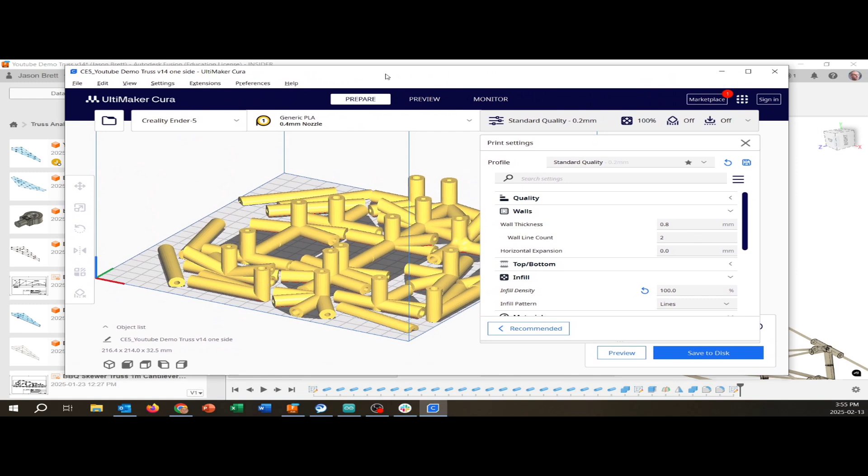So we've already taken a look at how to model the truss and check out its structural buckling in Fusion 360. And then we came along and designed all of these nifty little nodes right here. And now what we want to do is take those nodes out of Fusion 360 and put them onto our 3D printer. And they'll come out looking something like this.

And then the slicer software will be able to generate G code so that we can come down here and preview everything that's going to cut. And then we can take that and put it into our 3D printer. There's those flat sides that we left on the bottom of the nodes.

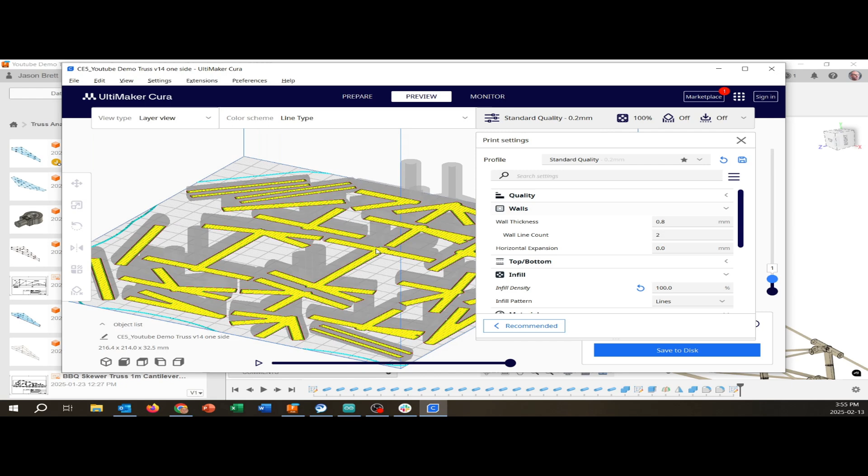And on the Creality Ender 5s in the shop, it might take a day. On some of the newer, faster 3D printers, maybe a little bit less. Really kind of depends on some of the settings that we put in there. So we're going to take a look at how to set all those settings up. But before we get there, you're going to need Ultimaker Cura on your computer.

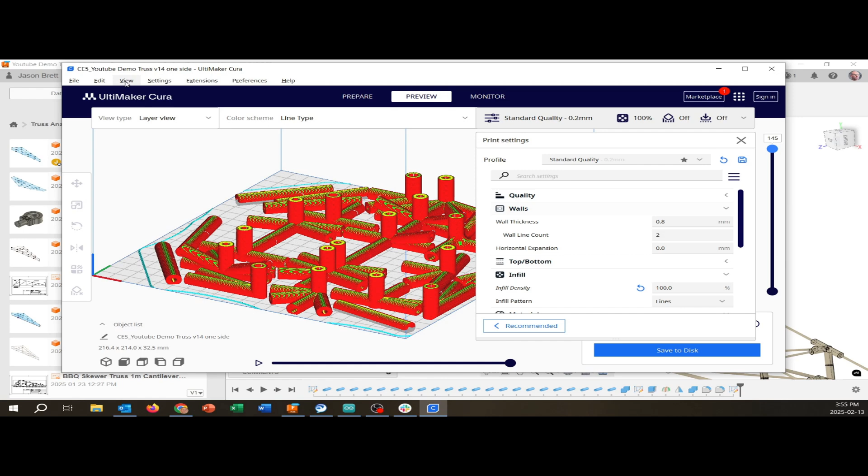Now, this is February 2025. I may be using different slicer software later on. You may have different favorite slicer software. All of the slicer software works pretty much the same. But anyway, I'm going to be talking about Ultimaker Cura. It works great with the Creality Ender 5 printers that we have in our shop.

So what you're going to do is Google Ultimaker Cura, come in here, download the latest version of Ultimaker Cura, and put it onto your computer. It runs on Windows, it runs on Mac, it runs on Linux. It's pretty cool, and it's great that Ultimaker makes that available. Not that they really had all that much choice, because the core of it is open source to begin with.

Like I say, there's other slicers. They're great. If you want to use your favorite slicer, go right ahead. You know what you're talking about. If you've never done it before, I'm going to be talking about Cura. Okay, so go ahead and download that.

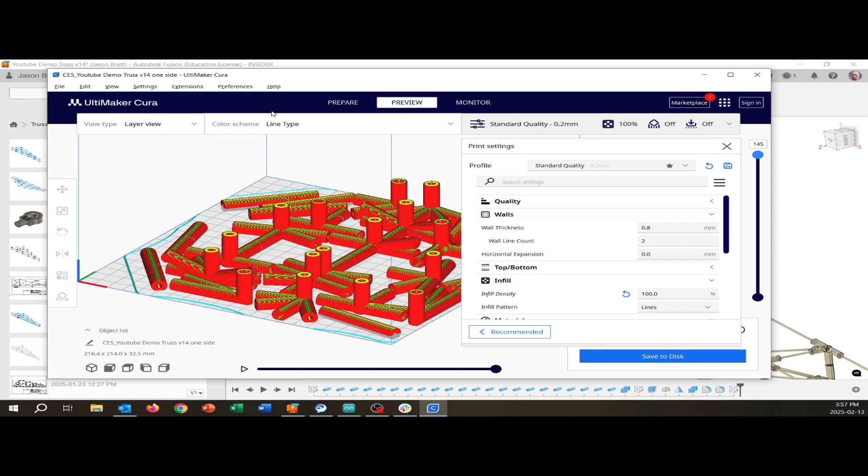And when you install Cura, if you're one of my students at BCIT, you're going to have to tell it what printer you're using. So you're going to set it up, and tell it that you want to create a file for a Creality Ender 5. And to do that, you'll come into Settings, and you'll go into Printer. And you can see I've already got Creality Ender 5 in there. That's because I've come to Add Printer.

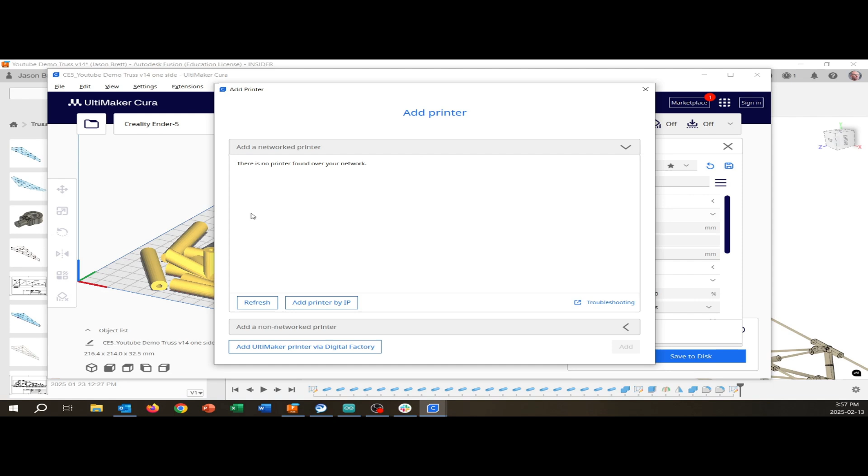And you'll tell it that you're using a non-Ultimaker printer. Where is it in here? Add a non-networked printer. It doesn't have to be an Ultimaker. You'll come down here, look at all of the different printer names. When you get to Creality 3D, in February of 2025, we have 3 Creality Ender 5s in the shop. So there we are, the Ender 5. It's not the Plus, just the 5.

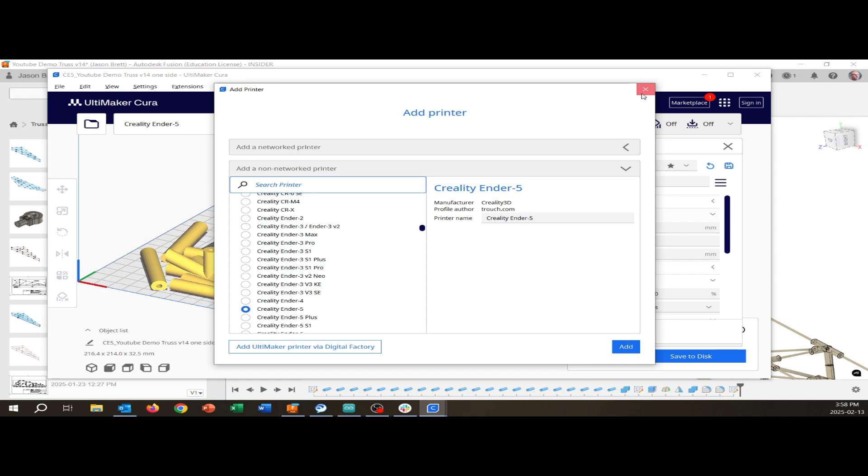So you can add that printer to your settings, and that will have all of the setup information on bed size, print speeds, and everything that you need to get started. If we have a different printer, well, maybe we'll be using different slicer software, and I'll tell you about that. If you have a different printer, you'll have to set that up for your printer. But again, you don't need me to tell you that if you've got your own printer.

Okay, anyway, this is where we're going to get. And this is where we are right now. We have a whole bunch of nodes, and we want to get them out and into Cura in the easiest way possible. Okay.

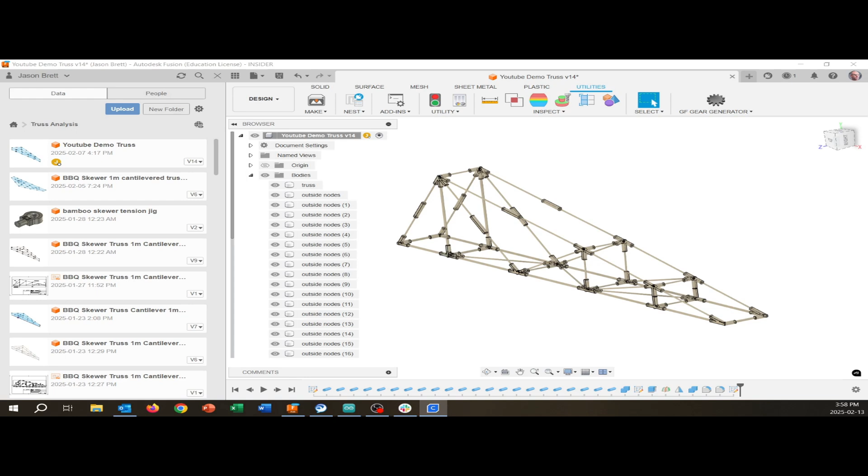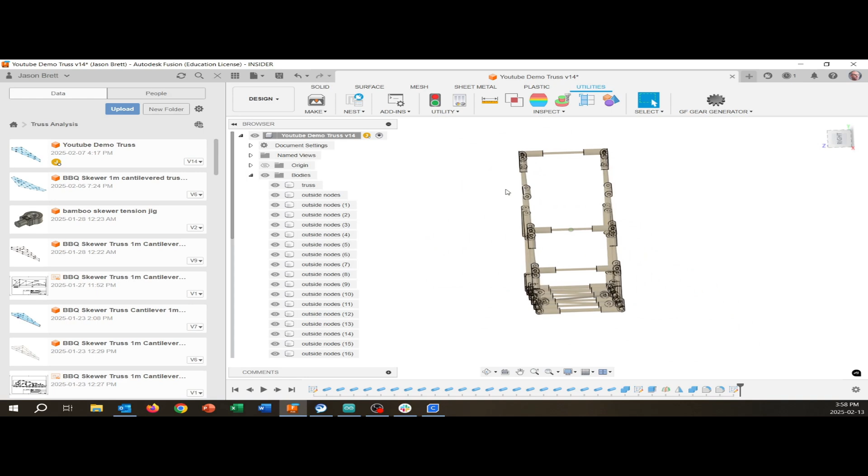Here we go. Alrighty. So I'm in here, and I can rotate around a little bit. And what I'm going to do is look at my project right from the end. And I'm going to export this in 2 halves. And the reason I'm exporting it in 2 halves is because I've got flat surfaces right here. And because we started drawing on the top plane, one set of these surfaces doesn't have to be rotated at all.

The other set of the surfaces has to be rotated down that way so that it fits flat on the print bed. Okay, so let's start this out. Now, we don't want to print the bamboo skewers. So make sure you come in to your bodies and turn off the bamboo skewers. You should just see the nodes right now.

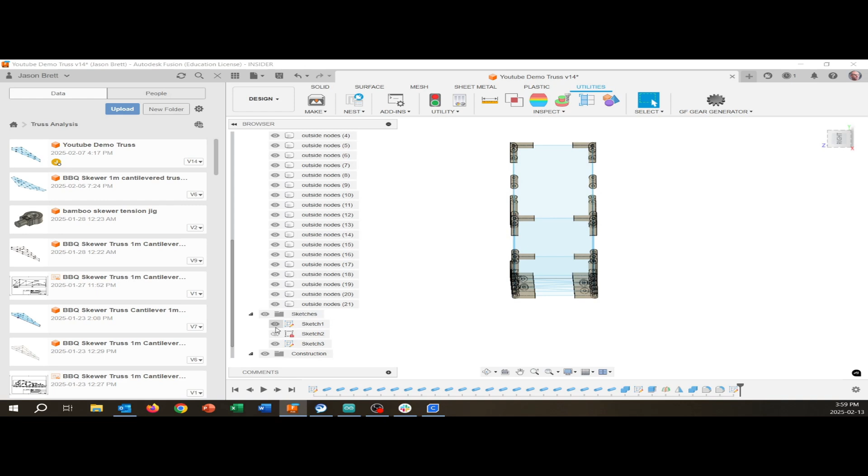It's possible that your sketch might still be turned on. Okay, so if you still see the sketch there, you can turn off the sketch. It's possible that you might have a construction plane turned on. So if you see a construction plane like that in the middle, you can turn it off. Not that that would be exported, it's just nice to get rid of it.

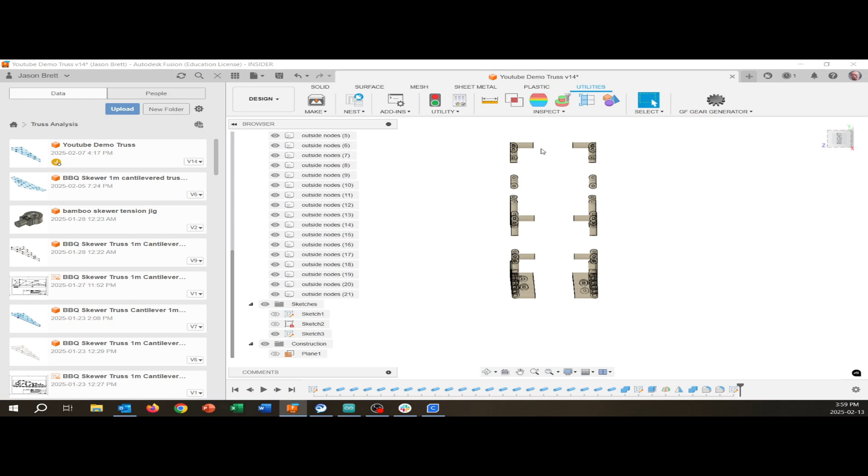Okay, now what we're going to do is we're going to export this half of our truss first. And in order to do that, we are going to highlight everything on this side. And I am going to right click on one of those. And I am going to come down to where is visible. Show hide. It's right down here. And you see that little eyeball? I'm just going to turn the show hide.

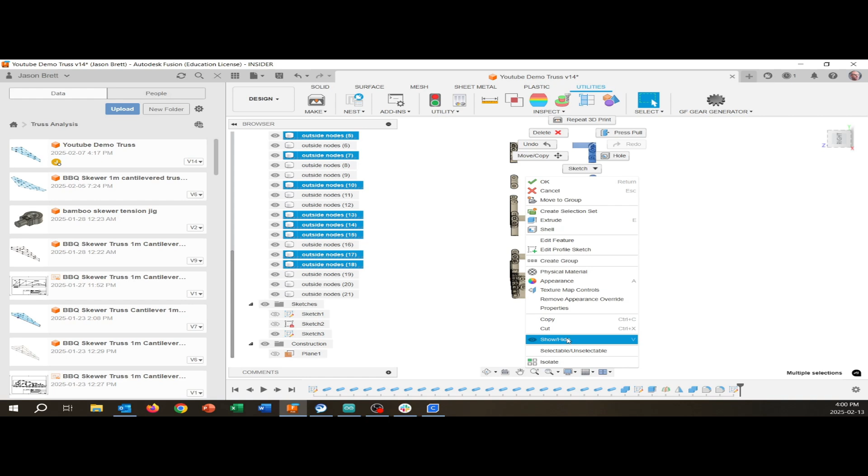And you'll notice that in our browser, all of those little eyeballs are going to blink off. And boom, I can't see them. They're still there. Just I've turned them off, right? Okay, and that means that I've just got these sections left, right in here. And they all have the same orientation. So whether I have to rotate them or not doesn't really matter.

Oh, I should have been working in solid mode, but eventually we are going to come over here, and to get these out of here, we are going to come to the utilities. So come along the top, and in the tab, come to utilities, and then you'll go make. And then you want to make sure that you've got this set up for export, because we are going to export this as a 3MF file. You could also export it as an STL file, but 3MF files just store a little more data more easily.

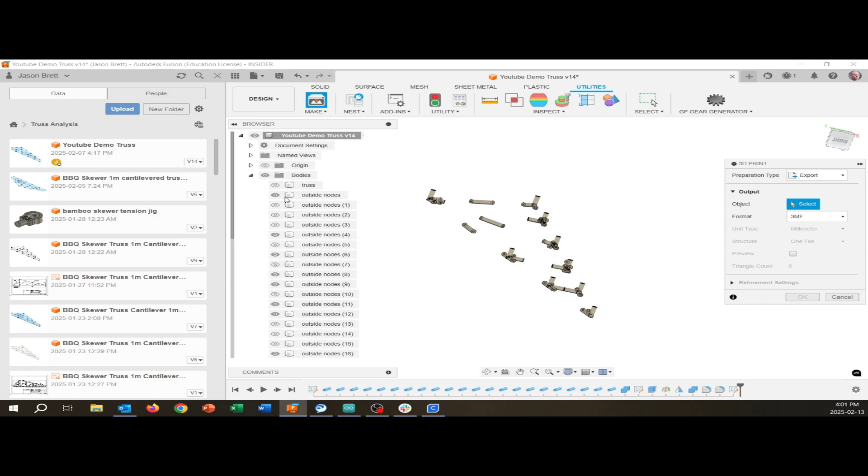It says object. What object do we want to select? Now, if you come in here and try to pick them up one at a time, you'll only get one object at a time, and you'll have to do like 26 different exports. So what we want to do is come over here to our browser and come up here and just click on bodies right up here. This is going to export all of our bodies, but only the ones that are visible.

Okay, so it shows you all of the bodies, but you'll notice that the ones that we're exporting are darker. Okay, those are the ones that we're going to kick out right now. And if we selected everything right, this should be good. So we're going to go export. I like to export as a 3MF file. If it says STL, you're fine too, but let's do 3MF. We're going to export them all as one file, so we don't have to bring them in one at a time. And we'll just hit OK.

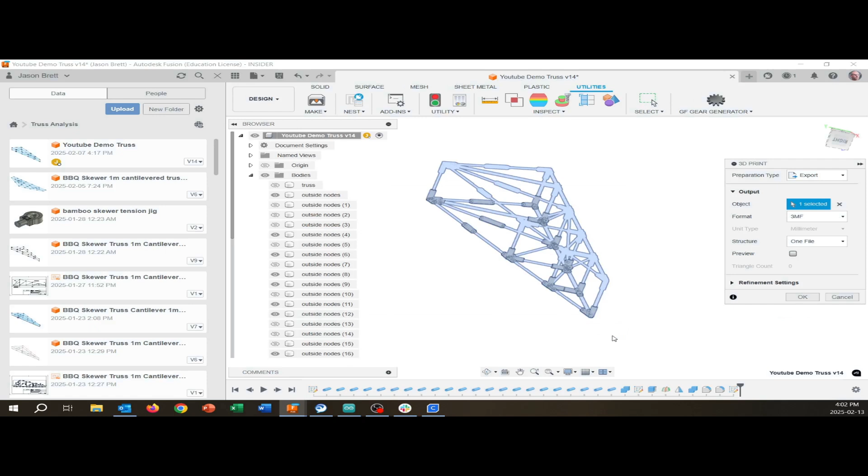Now, this window is going to pop up right here. You're going to turn on Save to My Computer. You're going to pick a folder that you want this file to go to on your computer. And I'm going to export this as my YouTube demo truss. Oh, I'm on to version 14 already. And I'm going to call this one side of the truss. I can't remember if it's the side that needs rotating or not, but I'm just going to save that. Bang, there I've got one side of the truss.

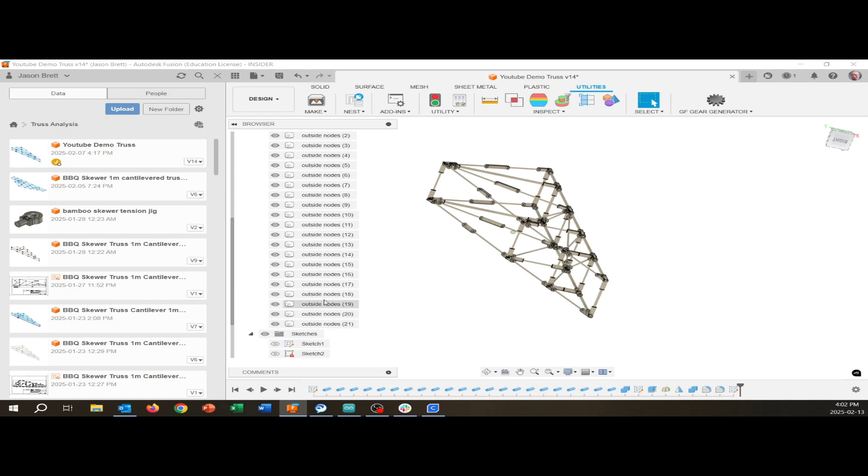Okay, and now I'll come in here and I'll turn all of these ones back on. Make sure you get all of them. I think there's probably a faster way to do that, but anyway, just check that all out, and they're all turned back on. And now I am going to turn off the other side of the truss. Oh, make sure I turn off the bamboo barbecue skewers. I do not want to export them. We put a lot of work into using them to create holes in our nodes.

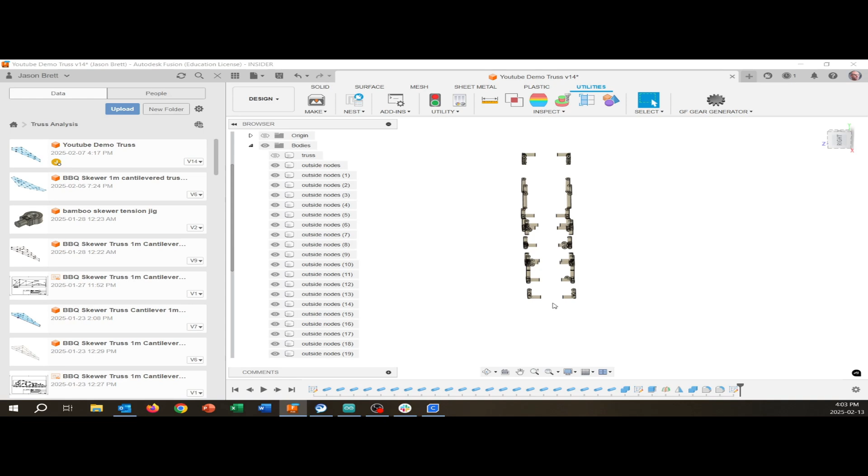Okay, and so now what I'm going to do is I'm going to highlight all of these ones that I just exported, and I'm going to right click on one of them, and I'm going to go show hide, and poof, they have all disappeared now.

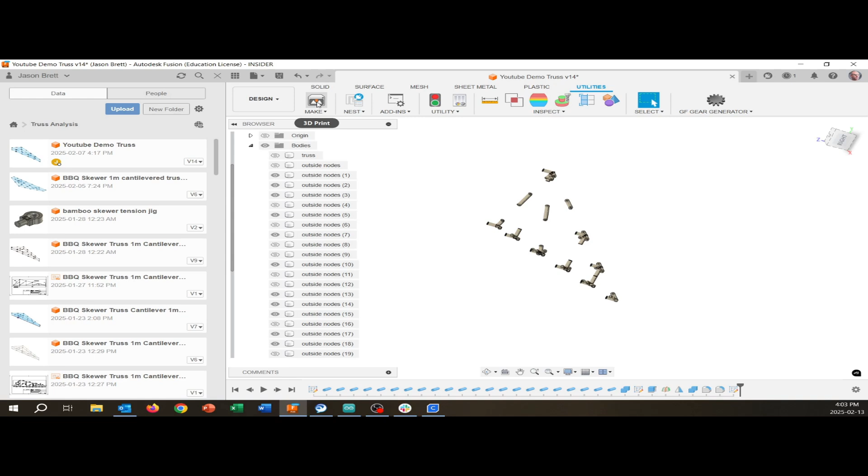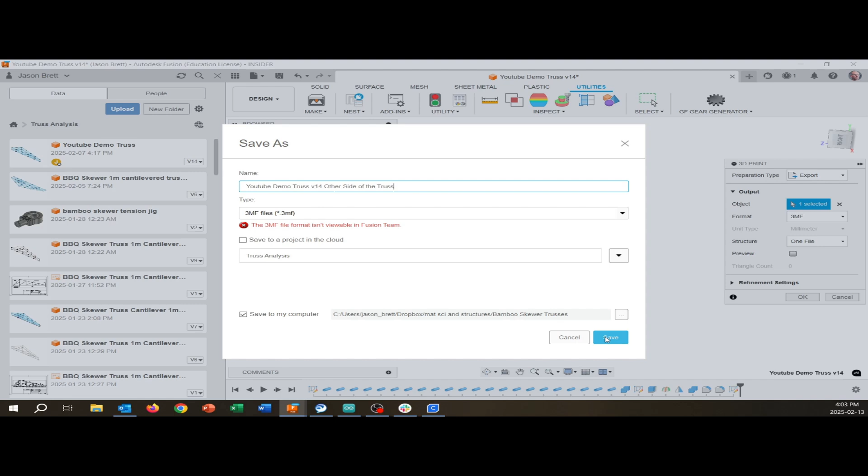And now when I go and do my Utilities, Make, Export, the object that I select will also be bodies, but you'll notice this time all of these ones are turned on, and I'm just going to say okay, and YouTube demo truss V14. I'm going to call this other side of the truss, and there we go. That's off to Fusion 360. I'm going to turn these all back on.

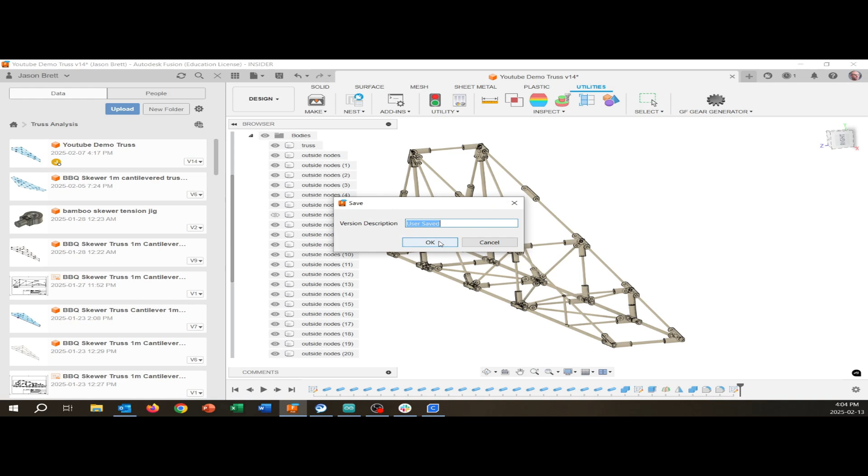And I have now extracted all the information that I need from here, and I can actually hit save. And I think we're pretty much done with that truss. We can close Fusion 360. Well, I don't want to jinx myself. I'm just going to minimize it.

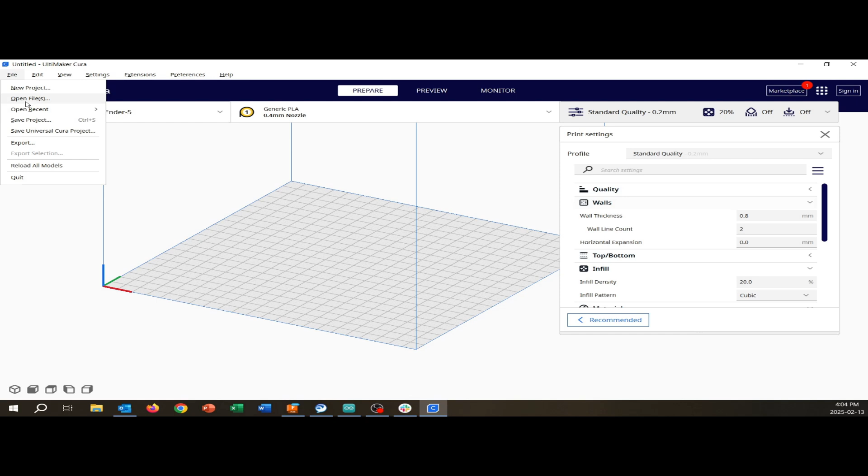All right. Now, hopefully you've had a chance to get Ultimaker installed on your computer, or your choice of slicer, and you've had a chance to get it set up so that it says Creality Ender 5 right here, or whatever printer this is going to be coming out on. Okay, and now we're going to come in here and go File, and open a file. Let's just search by date modified. Here's one side of the truss, there's the other side of the truss, and you'll notice they're in 3MF format. I'll start with one side.

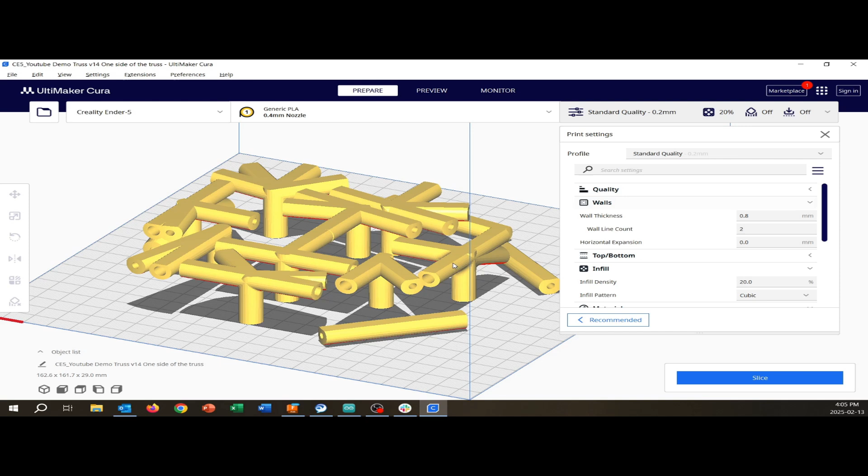And in this version, it brought all of those parts in, and you can see these ones all compacted down onto the print bed. Now I can rotate around and change my view. The right click button lets me rotate like that. Center mouse button is zoom in, and if I hold the center mouse button, I can pan. Okay, what I'm going to do here is pull that up, zoom out a little bit, use the left mouse button, right mouse button, and just go Select All Models, because I've picked everything up in here.

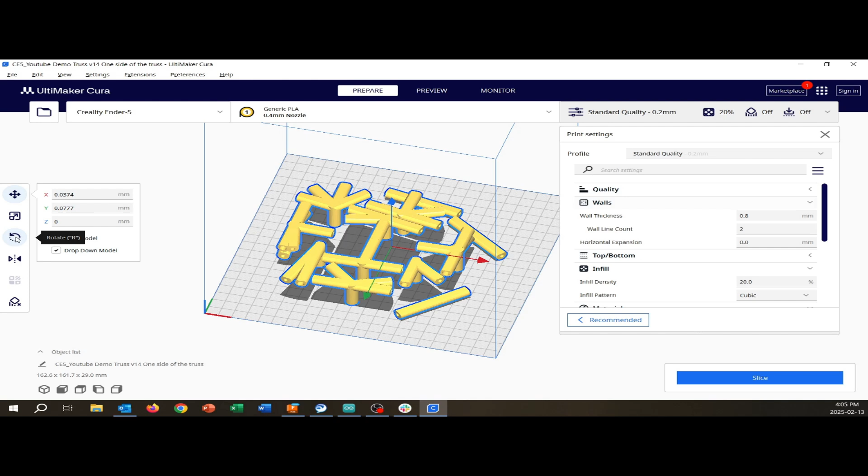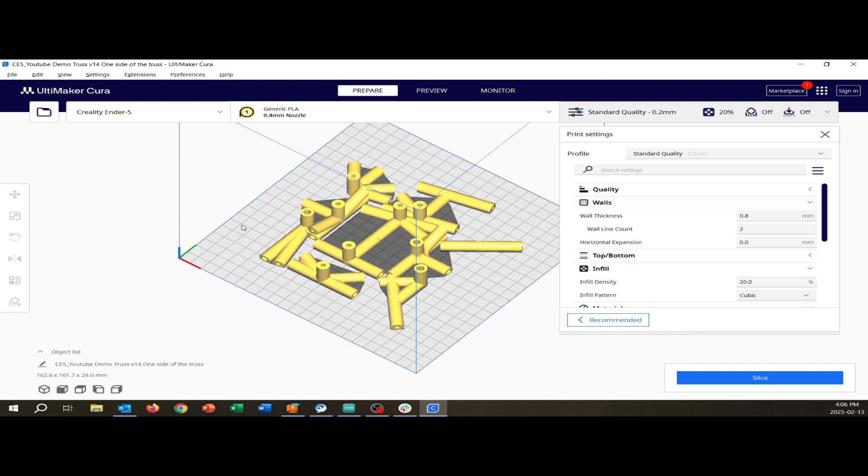And now over on this side, I have move, I have scale, don't touch scale, and I have rotate. And I'm going to take rotate, and I want to flip this around. If you look at it right here, all of these ones are upside down right now. I'm just going to rotate them all 180 degrees. Make sure you get that 180 degrees. That looks really good. And now you can see that because I rotated them around, they're intersecting with each other. So right click on one of them and go Arrange All Models. And Arrange All Models should give each of them their own space on the print bed.

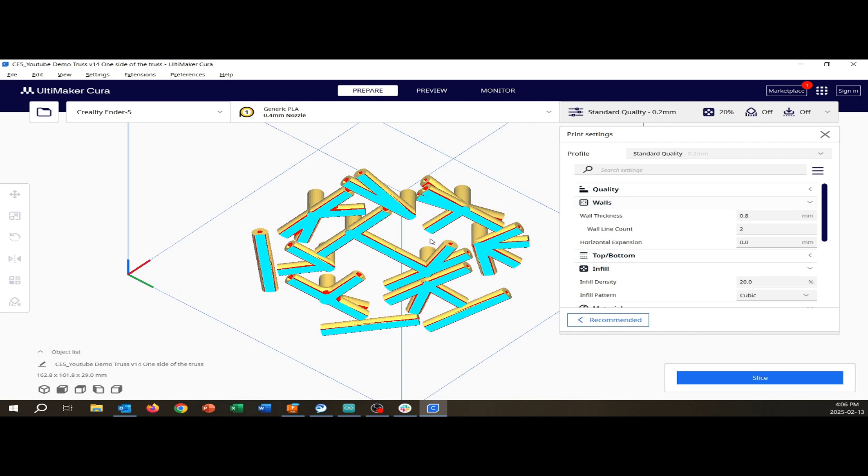You can also rotate down here, and you'll notice that they're all showing nice flat blue sides on the very bottom of the print bed. Those little stripes of red are areas where it would like to provide some support material, but we're not going to need that. The printer can manage getting by without a little bit of support material. We've also aligned these so that we're going to just print straight upwards here. Everything's flat on the bed, easy to print. This is about half of what we've got to print.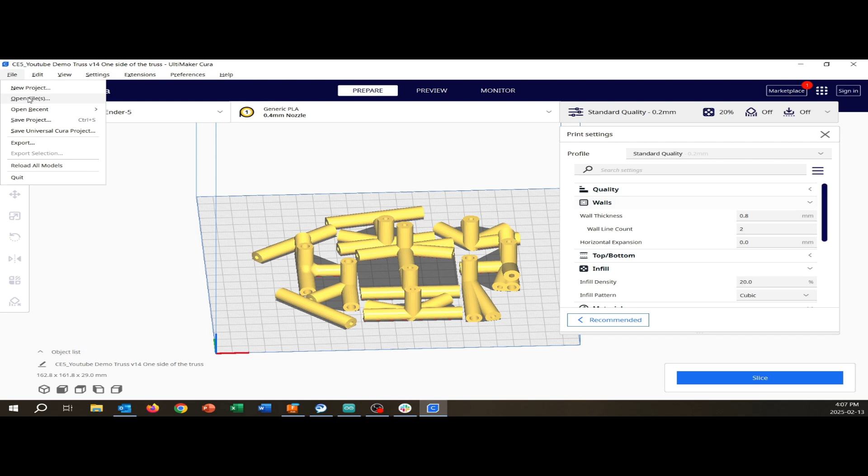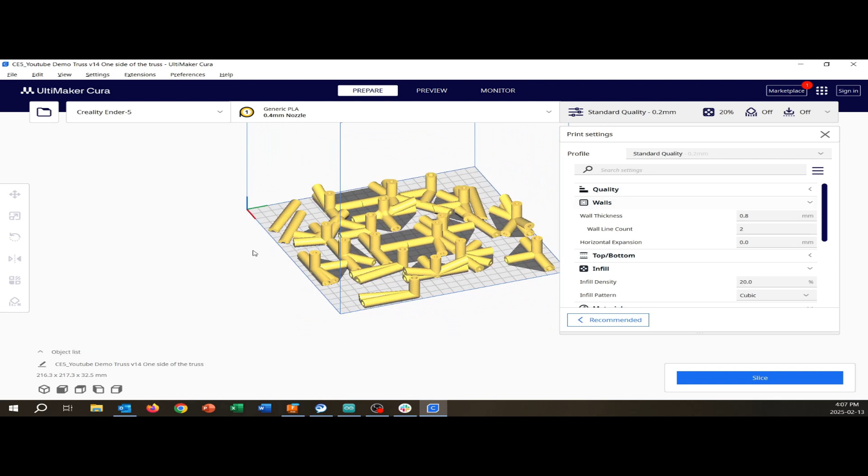It's going to be a full print bed by the time we're done, because now we're going to come in here and go Open Files, and we're going to do the other side of the truss. And thankfully for our case, the other side of the truss comes in really nicely, and we don't need to rotate it or really do anything with it. We can see nice big flat pieces on there, but we do need to come in and right click and go Arrange All Models.

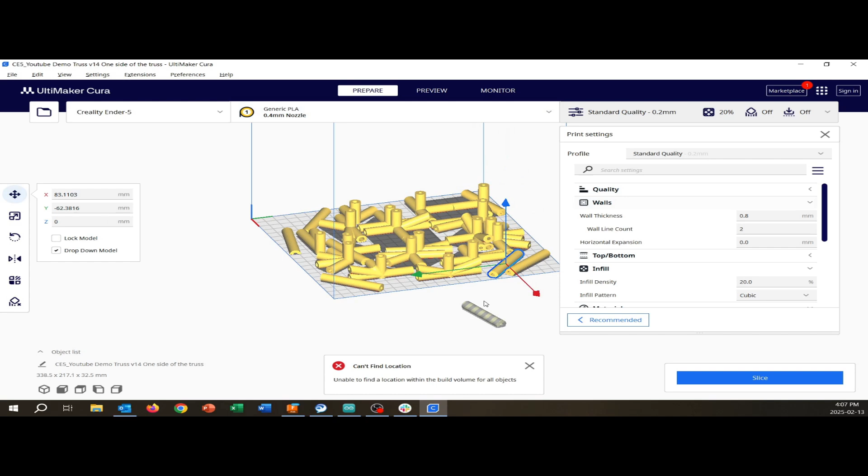And you see it says it can't find a location for that one piece, and we've got one or two pieces that aren't showing up as light blue. We'll deal with them first. Okay, so if you're seeing something like this, pick the piece that's not showing up as light blue at the bottom, come to Translate, or Move as it's called in here, and just lift it up in the air and let it drop down. And it should be showing as blue on the bottom. So I'm not quite sure what's going on and why that's not doing it. Thankfully, there's another way that we can get that to show a nice light blue surface on the bottom.

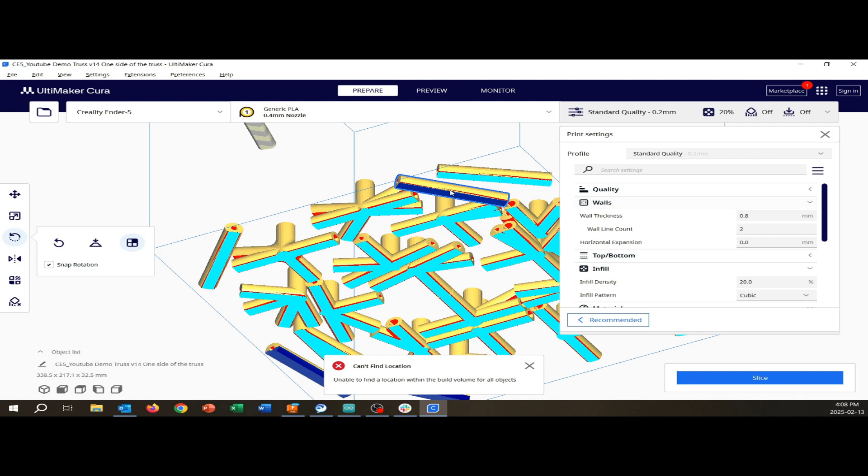We can come in here, and if I pick that piece and come to rotate, this icon right here, select face to align to the build plate, and I can come in here and tell it to align that face to the build plate, and well, I guess that's as aligned as it's going to get. Looking in that way, it seems pretty nicely matched to the build plate.

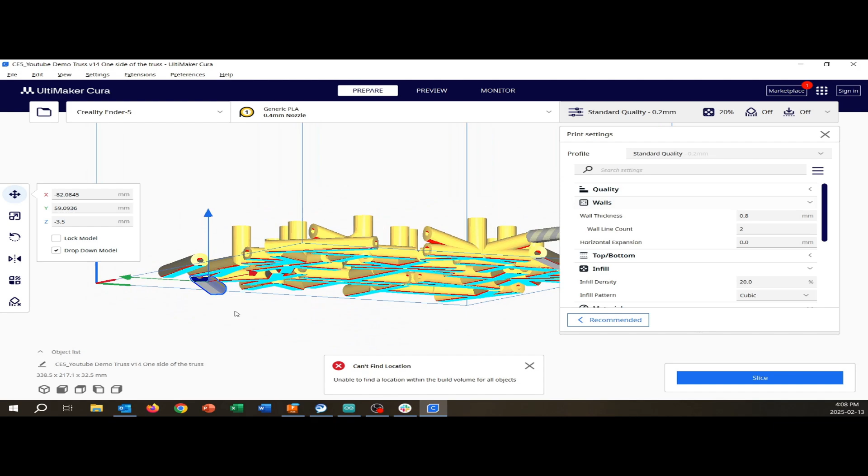You can see these ones over here are a little bit low. Those ones, I'll need to lift them up and drop them down. That one turned nice and blue, and that one turned nice and blue. This one's still giving me a bit of fussiness for some reason. There we go. It's nice and blue now.

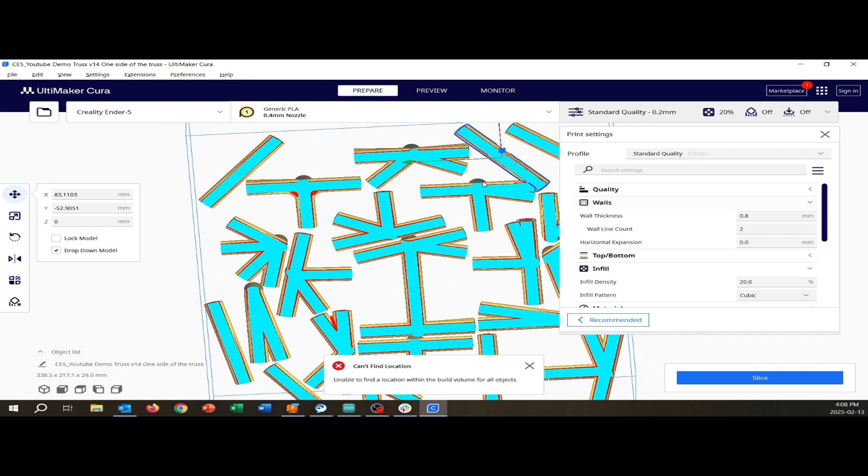All right, but we're kind of stuck because we've got one that's not quite on the build plate. The computer couldn't quite figure out how to fit it in there. So what I'm going to do is I'm going to look at this from the top. So under View, Camera Position, Top View. Now I can see everywhere where I've got a little bit of space, and I'm a little bit hamstrung because remember we had two nodes that were really close together. They're actually going to print together.

I don't know how you're going to be able to get your skewer in there. You might just end up having a 3D printed node for that one. Wasn't my intention, but that's how it's going to work out for some of these trusses if you've got really short pieces close together. Okay, so what I'm going to do is I'm just going to click on move.

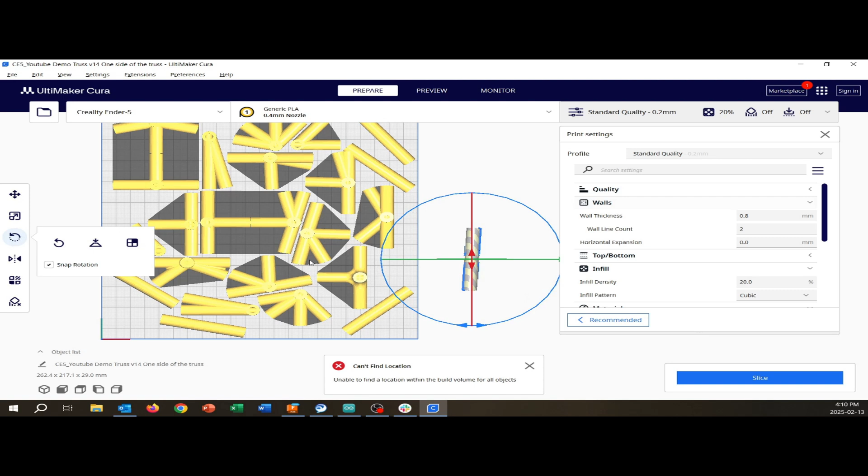I'm clicking on this piece that's not on the bed, and I'm like, where can it go? Now I can't overlap it with anything else because that would be silly. They'd be all stuck together, but there might be a bit of space if I rotate it. So I click on rotate, and you can see I've got different axes showing right here. I'm going to bring that, and if it's moving in big glops like that, you can turn off the snap rotation here. And not everything we made is going to be perfectly aligned.

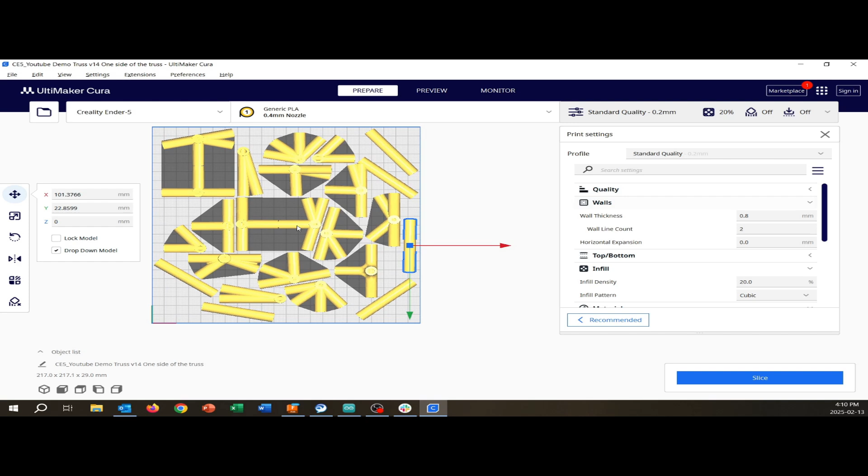That looks pretty good. And now I can come back to move, and well, you can just click on it, slide it in right there. And that looks okay. Now, because I told it I wanted to see the top view, I can't get away from that top view. I need to come in here, and if I want to change my camera position, I need to change it back to the 3D view.

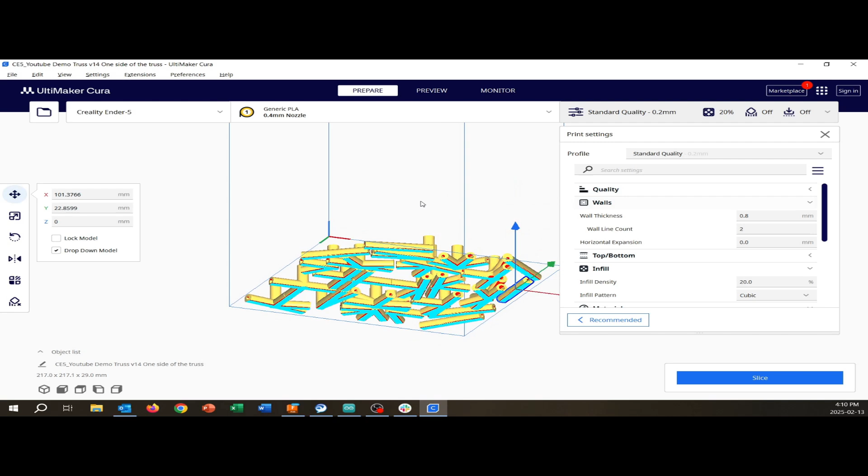And now I can pan around. That one's showing me blue right there. Let's lift it up and down. And there we go. Now it's snapped onto the build plate. It's looking really good. We should be able to print that, no problem at all.

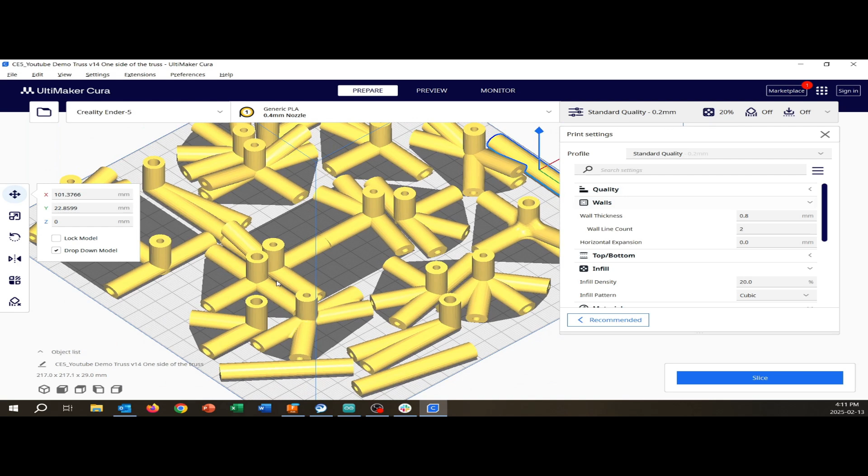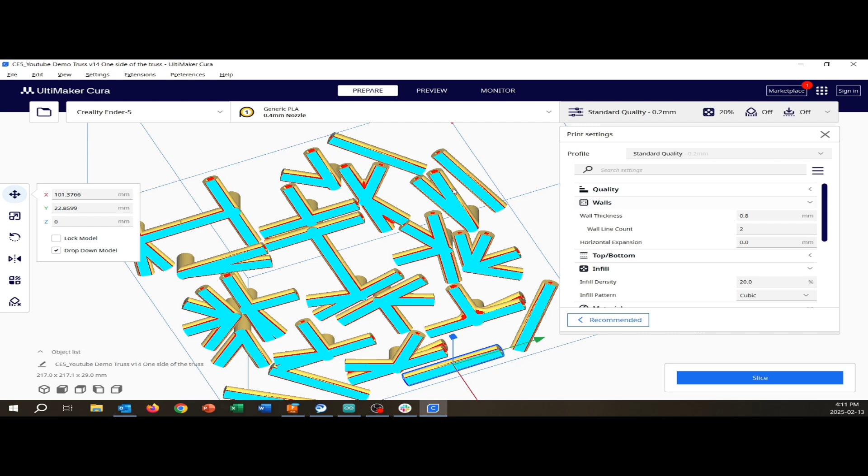And just a little double check, you can see that we've got some 3.2 millimeter diameter holes, some 5.5 millimeter diameter holes, in other words, big holes and small holes, and at least one of these parts should be filleted. And if I look at the bottom right here, do I see a 3 on one of them? I can't remember if I saved that 3 or because it was an optional video, I just let it go.

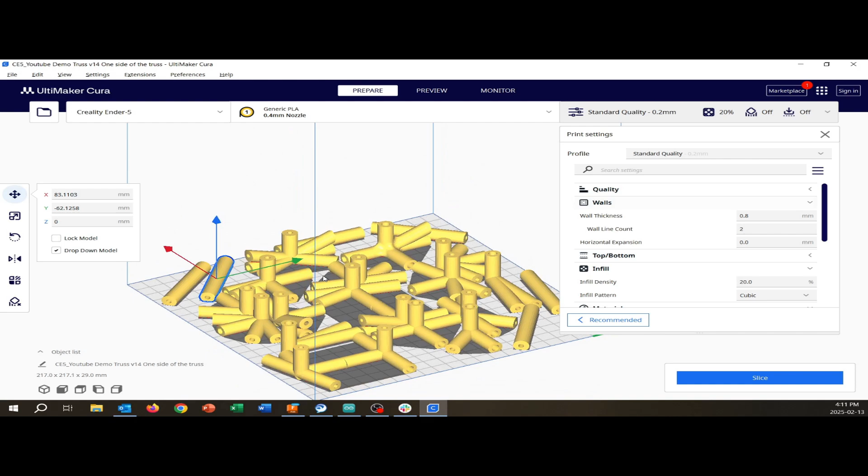Oh, now see that one right there? We could break that apart afterwards, but I don't think those two are supposed to be connected. Yeah, that doesn't look right. What the heck happened right there? So let's just try taking move and moving this one a little bit away from there. That looks better. And do take a moment to make sure that you've got everything into place and that it all makes sense to you.

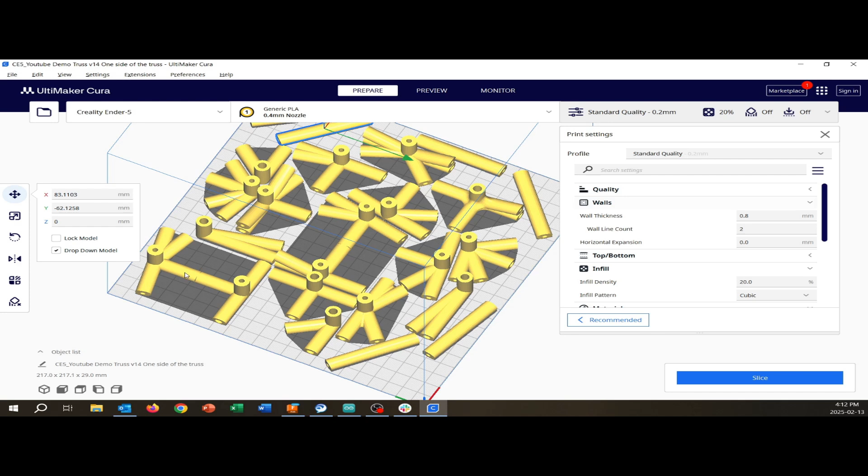We've got two matching parts that are kind of printed and stuck together. They weren't meant to be that way, but it looks like they are going to be that way. They might break apart for us so we can get a truss in there. Anyway, I'm not obsessing over that at the moment, and we've got a video to do.

So now you've got all your parameters in here, and you know what? Standard quality 0.2 millimeters is gonna be fine. A couple of tweaks will make it even better than fine, so you can come over here and use standard quality.

Now yours might need to have a drop down right here, so you can come in here and click this. If you're not seeing what I'm talking about, just look in here. You've got some settings. There's standard quality, super quality, all these different quality levels that you can get to, and basically that is fancy ways of saying your layer height. So I'm going to show you a couple of different things that we can try in here.

The first thing I'm going to say is let's change your printing temperature up a little bit. I find my printers work with PLA a little nicer at 205 degrees than they do at 200. You can tweak this on the printer later on. We're also going to change the build plate temperature. We could go up to 60. Okay, 55 works nice sometimes too.

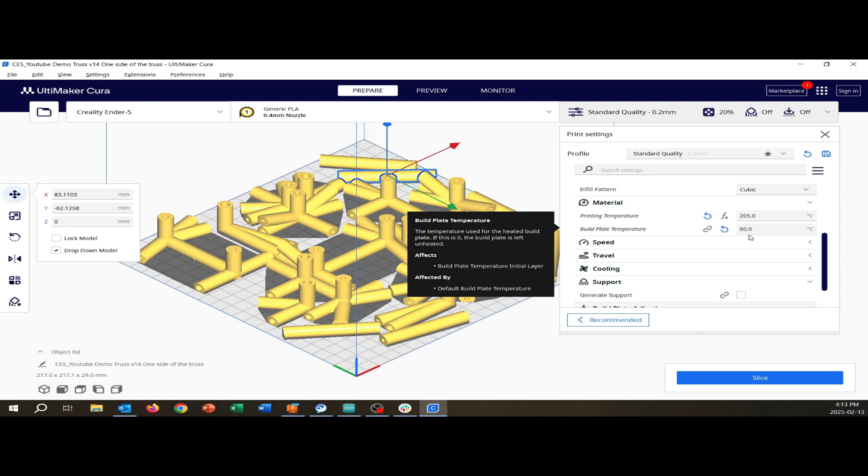I've got some glass plates that work really nice at 60 degrees. Just that little extra heat lets the bottom layer of plastic bond really well. And because we're going to have a lot of small surfaces on that bottom layer, we want them to bond really well. Speed, you don't need to adjust. Travel, you don't need to adjust. Cooling, you don't need to adjust.

Generate support, you definitely want that to be turned off, because otherwise it will put support material inside your nodes where you want to put bamboo barbecue skewers. So don't turn that one on. Build plate adhesion type, I like skirt. But if you're having a hard time fitting everything onto the bed, you could tell it none, and that will free up a little bit more space around the margins.

You'll just have to remember, if you tell it that, you're going to have to be really careful when you print to stick around and watch that first layer get stuck down to the bed. We don't have dual extrusion on this printer, so you're all good. Once you've made those couple of tweaks, you can click on Slice. And the computer will think away right here, and it's going to tell you it's going to take 19 and a half hours to print this out, and it's going to use 132 grams of filament.

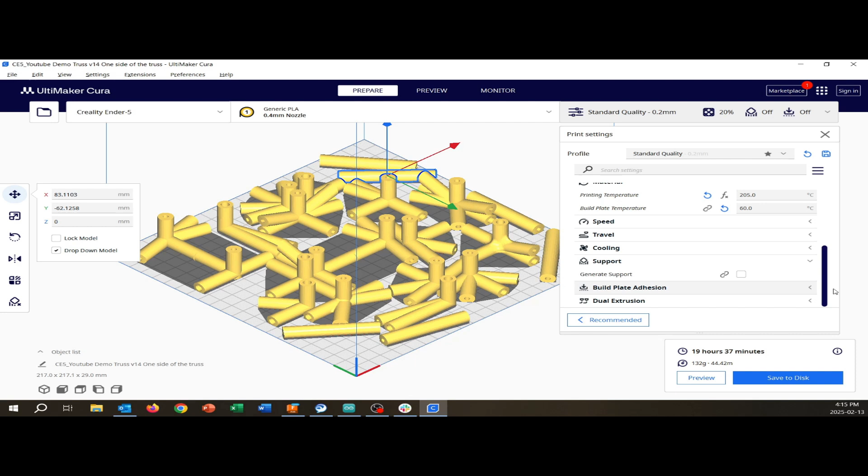So I'm not worried about that right now. 1 kilo of filament is about 20 bucks, so you're using maybe $3 worth of filament for this project. Could start to get expensive if you're doing it with a high school class and a couple iterations of trusses. But by and large, a couple dollars on bamboo, a few dollars on the nodes, and you're probably going to do okay.

Now, what's really cool when it tells you this is that you can also click on Preview. Everything's going to change its appearance a little bit. And zooming in right here, you can actually see the individual fine lines that the 3D printer is going to be printing. And if I come over to the right-hand side of the screen, I can drop it down layer by layer by layer. And what you're seeing in the middle right there is what we call support material.

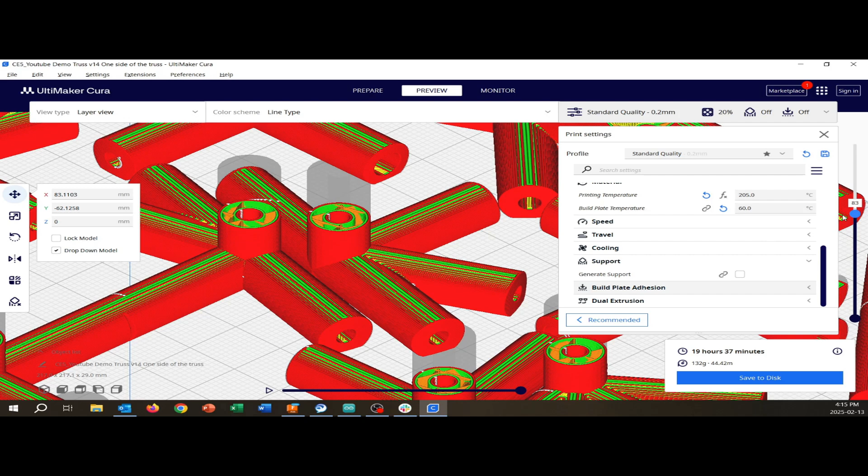Most 3D prints are hollow on the inside, and they're just, not support material, infill material. So this orange material right in here is infill material. And most 3D prints are pretty hollow on the inside. Like there you can see there's just a mesh on the inside. And where your strength usually comes in is in the outer wall thickness.

Now if I zoom in a little closer here, there we go. You can see that right now I'm only getting 2 passes of the nozzle on the inside and on the outside right here. And I'd like to increase that to make it a little bit stronger. I got a couple of ways. One, I could just tell it that I wanted 100% infill and it would solidify everything right in here. But even before it does that, I'd like to get a couple more passes right in here.

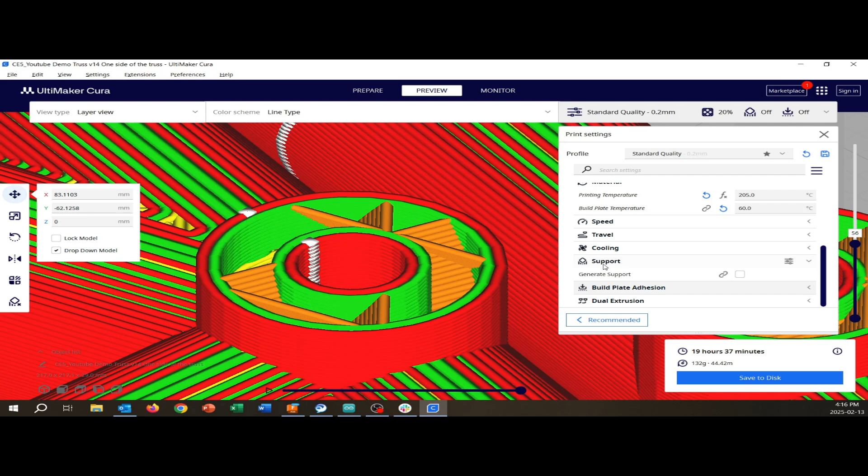So what I'm going to do is in my settings, I'm going to come right back up here and under wall thickness, I'm going to make it 1.6. Now in here, I'll usually use multiples of 0.4 because I have a 0.4 millimeter nozzle. You're not required to, but let's see what it looks like with a 1.6 millimeter wall thickness.

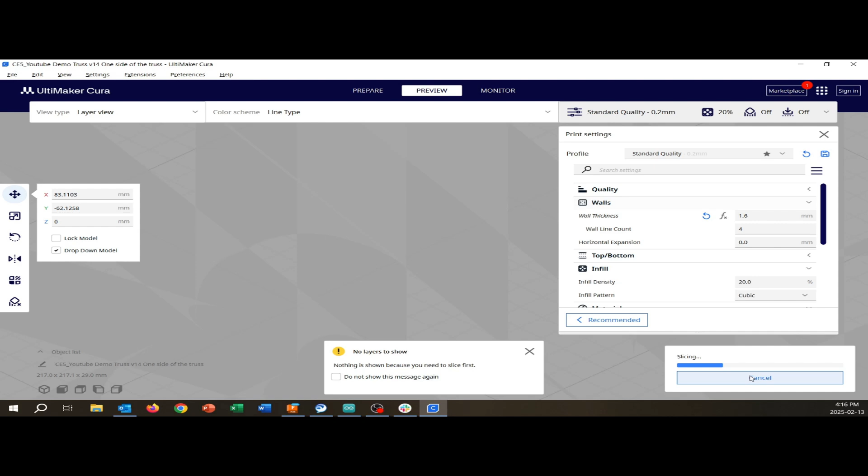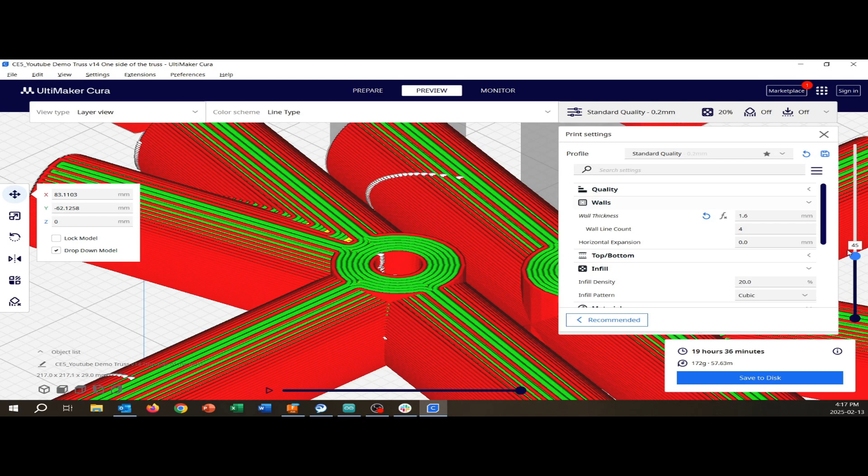It's not going to take that much longer. And now you'll notice that when we're looking in here, this is going to be solid all the way through. This is one of the parts that tends to break off. So instead of having infill in here, I'm pretty happy to be having solid material coming all the way up there. And then when we hit here, we get a little bit of infill right in there, but not nearly as much as before.

Now, if you wanted to make this just a little bit stronger in here, you could come in and change your infill density. Let's change our infill density up to 40%. And then you can slice it again, and we can see what that looks like. Now we're up to 20 hours and 176 grams of filament, and you can see that that orange pattern in there is a lot more dense.

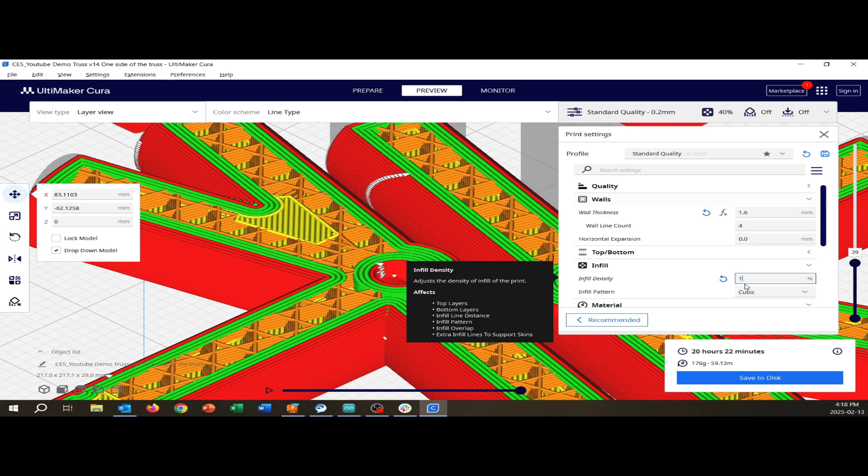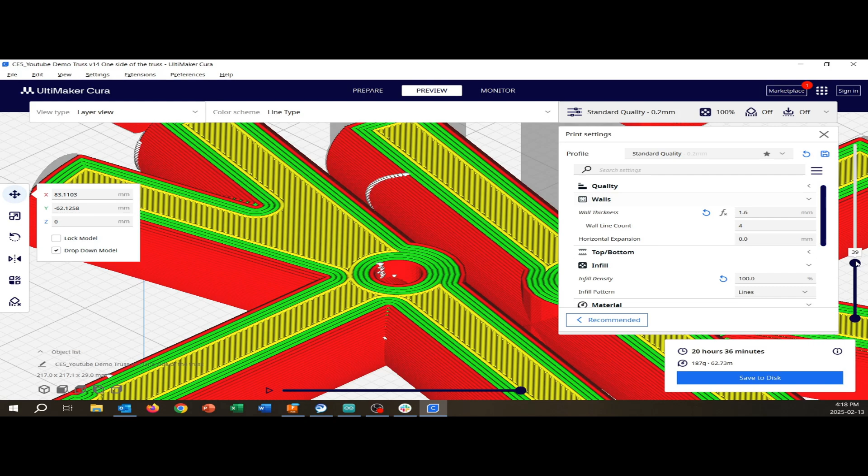If you want to see what happens when you try 100% infill, which you're welcome to try on this project. Normally I would advise against it, but strength matters here. Slice it, 100% infill. And we're up to 20 hours on here. So not so bad. You can put that on in the evening before you go home, and it will be finished the next day when you come into the shop, and you'll be able to take all these pieces and build your practice truss. Ultimately, you'll be able to have all these pieces given to you, and you can figure out how to piece them together to build your final truss.

If all of your pieces don't fit onto one print bed, we may have to print a second print bed. So you can set your file up and export one side of the truss, put that on one print bed, export the other side of the truss, put it on the other print bed. It's a little bit more work, takes a little bit more time, but if you've made a heck of a lot of nodes, you're not going to fit them all on one print bed. Okay, so if you need 2 print beds, do one side of the truss on one and then save that file, and then the other one on the other side.

Now, for my students, when you get to this stage, you probably want me to take a look at this, because this is probably your first time 3D printing, and I'll go over it with you. And if it looks something like this, it's probably going to be fine. And when I say it's fine, you'll go to the Creality Ender 5, you'll get one of the micro SD cards off of there, come back to your computer, plug the micro SD card into your computer, and then you will save to the removable drive. A little option will pop up in here, or you can just click Save to Disk, and you can save that G-code file onto there.

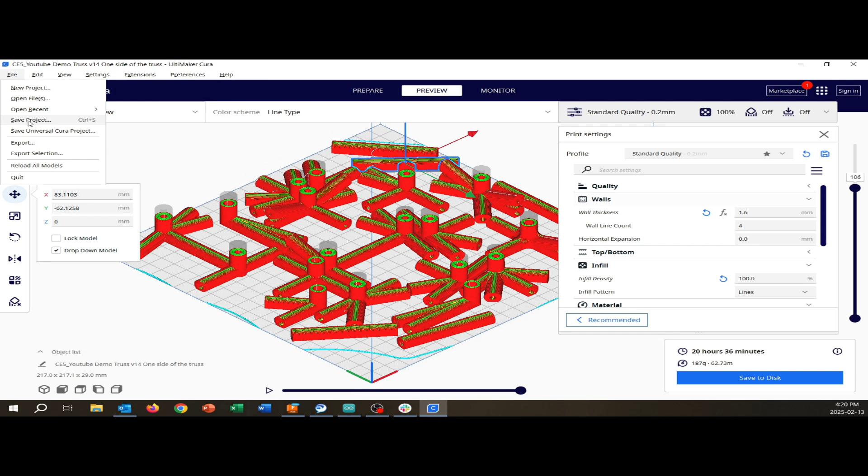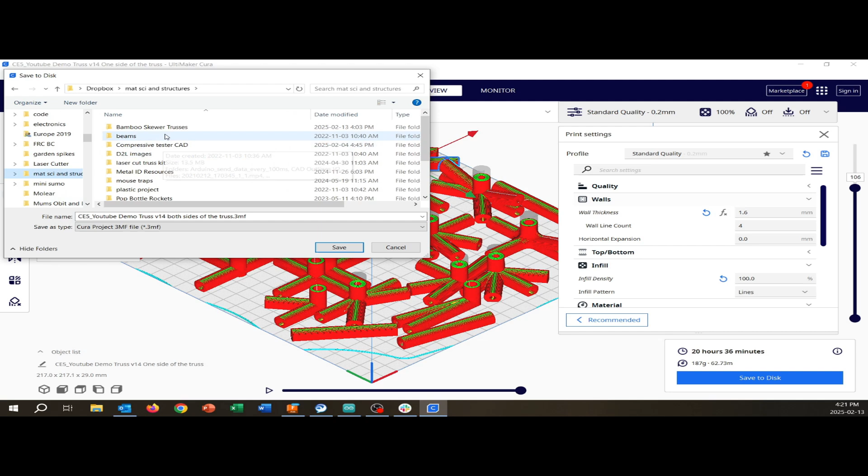Okay, good idea before you close this down is just to hit Save Project. I'm going to call it both sides of the truss. Oh, yeah, helps if I save it back to my folder, not to my C drive. Where is my Dropbox on here? It's way up here. That's the instructor. This is where I'm keeping all my stuff. Bamboo skewers, both sides of the truss. There we go. So the 3MF file is kind of like your source code, and the G-code is kind of like your machine code, because that's going to the machine. Alrighty then, things are saved.